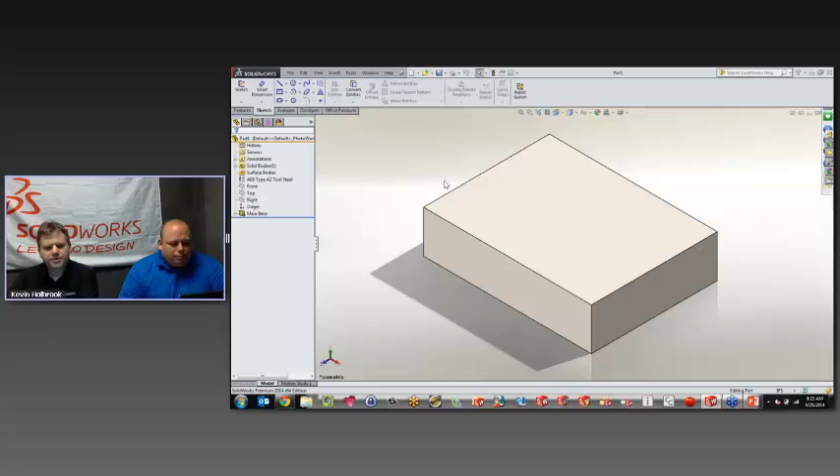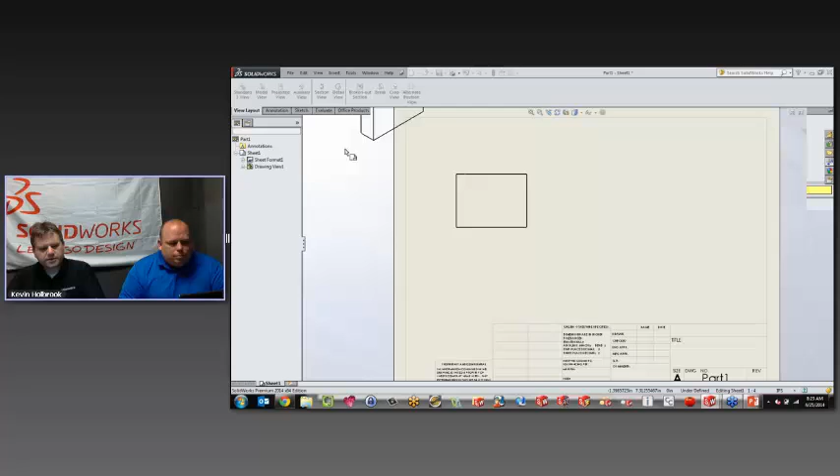So let me just open up a part here. And this was actually one customer that came to me the other day. If you are making a drawing, so let's just save this to my desktop. Just have a block here. Let's make a drawing of this. When it comes to updating your dimensions inside of SolidWorks drawings, one of the neat things is that if I'm placing a dimension in here, this one is 8 inches, when I change the model, it updates, right?

But I think it's important that, again, as Rob said, they do listen to customers when they have suggestions of things that they need to see. If you didn't know, if you go over and right-click on the top of your drawing here, there are actually checkboxes where you can check or uncheck if you want the view to update automatically.

So if I keep it checked on, as it is by default, if I go in here to my part and I change this to, for example, 12, and let's do a Control Q so it's updated, then it has automatically updated on our drawing. That's how we normally see it. But sometimes, if you're playing around with different sizes or different things, maybe you'd rather want to be flagged about it.

So you can actually go over here, and if you uncheck this automatic view update, now when I go back to my part and change this to something else, maybe 6, you will see when I go back to my drawing, now it has this orange, yellow update here, and we got the flag. So I think this is important to know. Now to fix this, all we really have to do is a rebuild, and then you will see that it updates. It's kind of like one of these gates. So that could be handy for you, and it will flag, right?

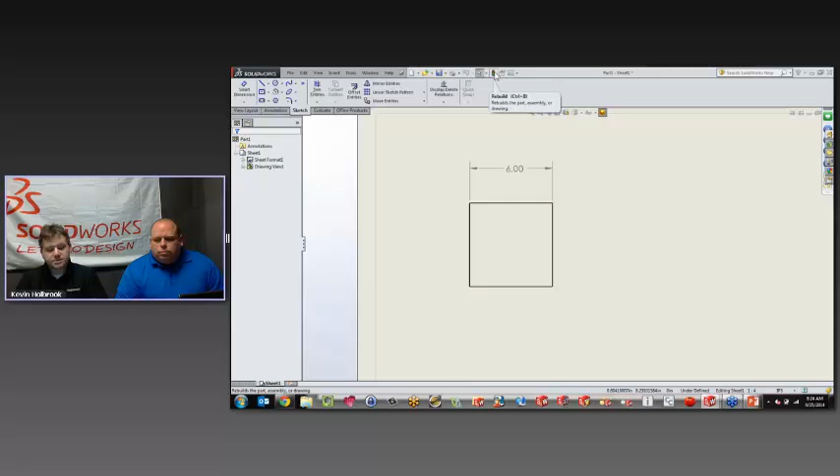So it's not like it's going to do it automatically, it will just ask you, hey, are you sure you want to update that? I thought that was a pretty neat little trick.

On the assembly side, that's great if you have a large assembly that takes a while for the drawing views to update. Maybe suspend that a little bit. That's a good one.

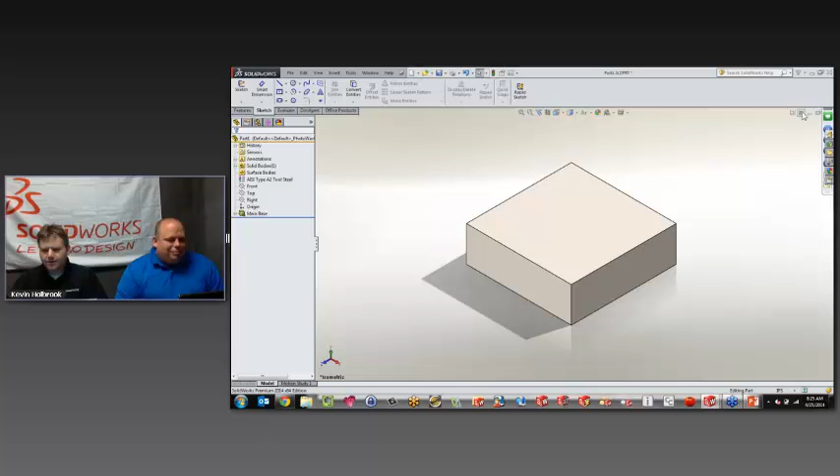Yeah, absolutely. Another thing I wanted to show here before we send it over to Kevin is, let me just open this. I actually spent a little time and modeled something really complicated up, and now I have this in RAM because I saved this. Now I have everything open here.

All right, Kevin, I know that you're working in SolidWorks a lot, but I wanted to ask you a question. Do you ever use Format Painter when you're inside of Word? You know how you can take some text and change it over? I have seen it. Have I ever used it? No.

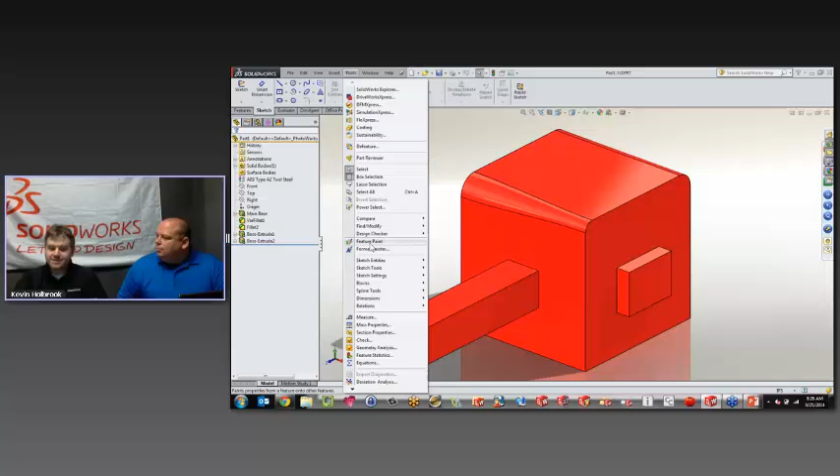Now, did you know that in SolidWorks there's something called Feature Paint? Do you ever use that? I have not. It's one of these interesting ones where it's always fun to come up with tips and tricks, and then when you're goofing around inside the software you're suddenly like, what does this do? Well, Feature Paint is inside of SolidWorks right underneath your tools, and what it will let you do is take a feature and copy its properties over to another feature.

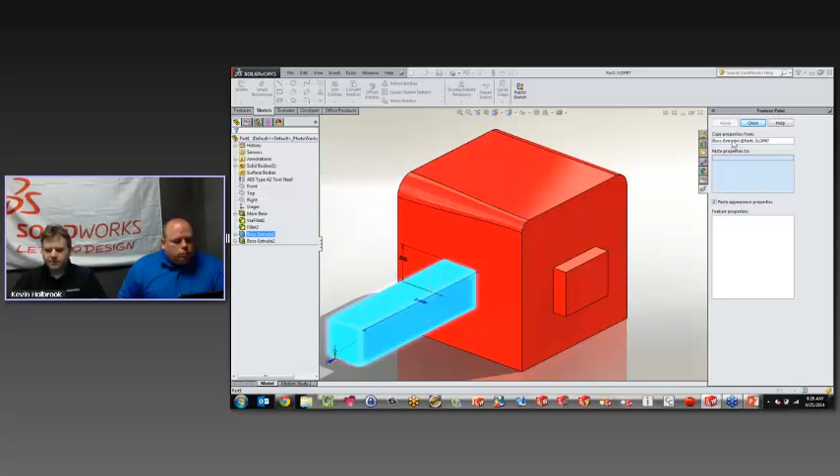So in this case, I have this very long boss right here, and this little short boss over here. I can go over and click on my large boss, and you'll see that was selected. Now I can select my short one, and all the properties for that one apply here. If I hit apply, you'll see the second one suddenly took the same depth as the first one. So if you have some pockets and know that depth is what you want the others to do, you can use Feature Paint to bring that over.

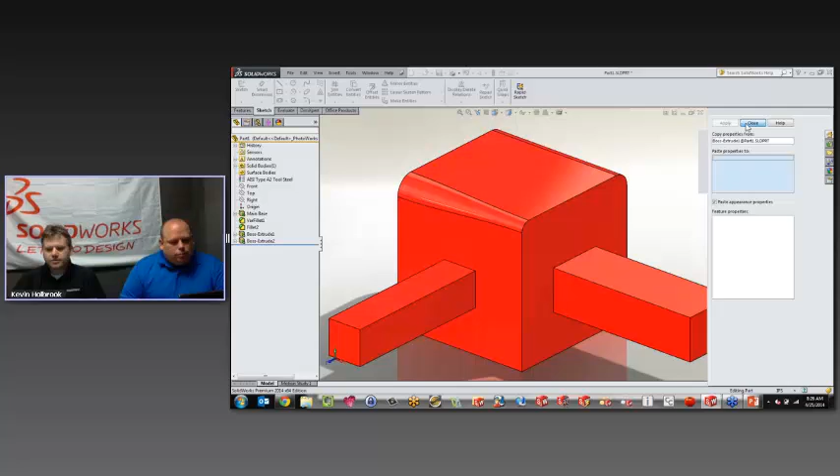It also works on colors too. So if you ever work with somebody, maybe somebody like me, who goes in and decides they're gonna paint a certain feature - in this case we cannot do faces or bodies - but if I go into this variable fillet here and decide I'm gonna make that one, let's get a little dark purple, because if it's too purple people are gonna make fun of me.

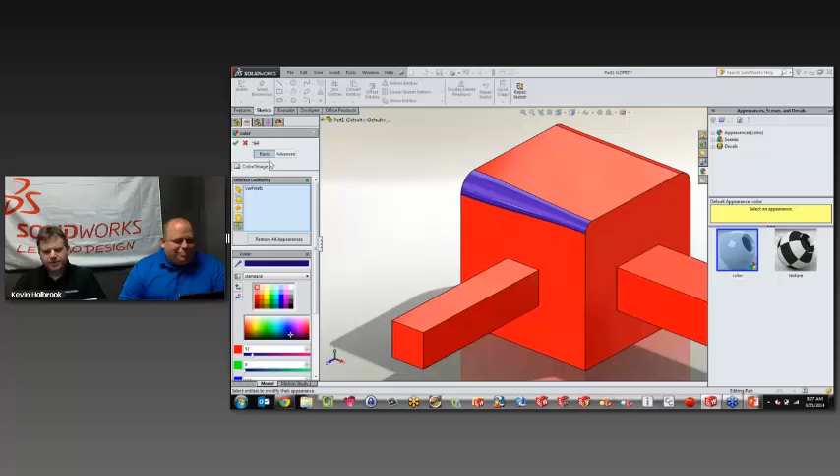You can take this color and paste it over on another feature. So if you go into Tools and Feature Paint, you could select that variable fillet over here, and again we have the fillet sitting on the other side. We can select our feature tree - seems that was a little bit easier - and now you can paste those colors over there.

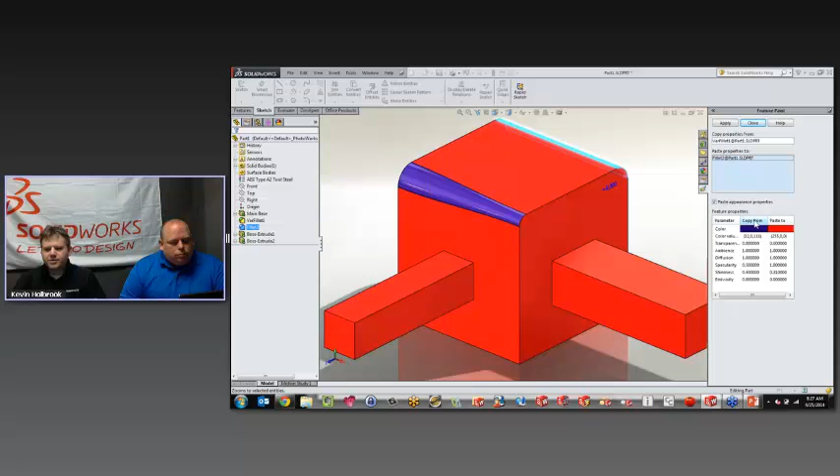Now you could also do that in SolidWorks - they added a new function a few releases ago. If you click on that - oops, let me get out of Feature Paint - click on this one here, there is the copy and paste appearance. You can go over here, click on the two small beach balls, copy that appearance, and then go over and paste it onto that too.

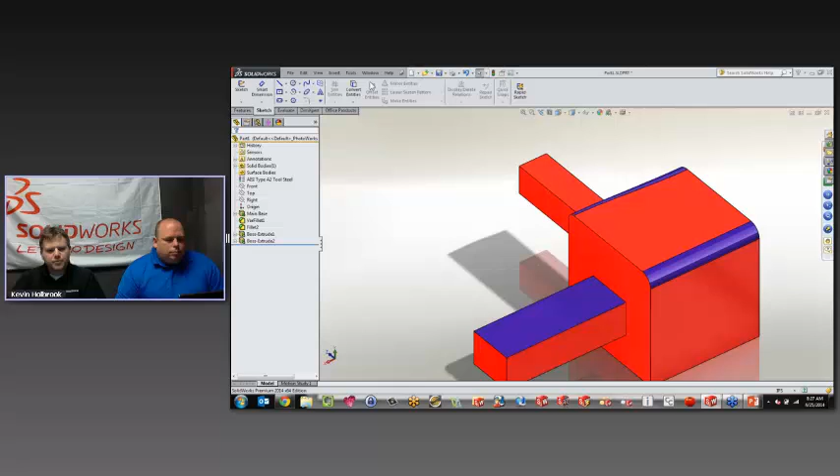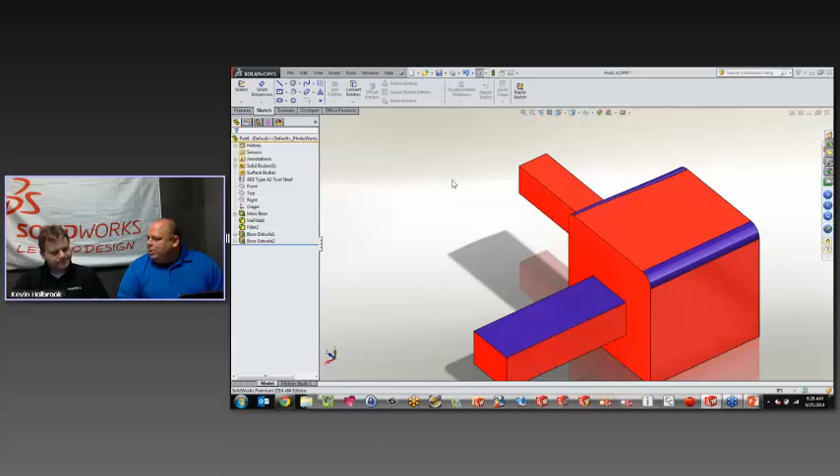But this Feature Paint, I think, is a pretty neat new discovery for many. Sure, there's a lot of uses for it. When you start thinking about it, you have some different pockets all at a certain size, and other pockets that need to be that size. All of a sudden you decide you want to make all the holes the same depth - you can go edit the feature and go through each of them, or you can just go over this feature tree. Heck, nothing wrong with that.

Cool, all right, so let's see, what do you got, bud? So surprisingly, Lars, I found a drawing tip and trick, just like you. Awesome, that's been there, it's just kind of one of those things that maybe you're just not aware of why it does certain things. I just want to illustrate.

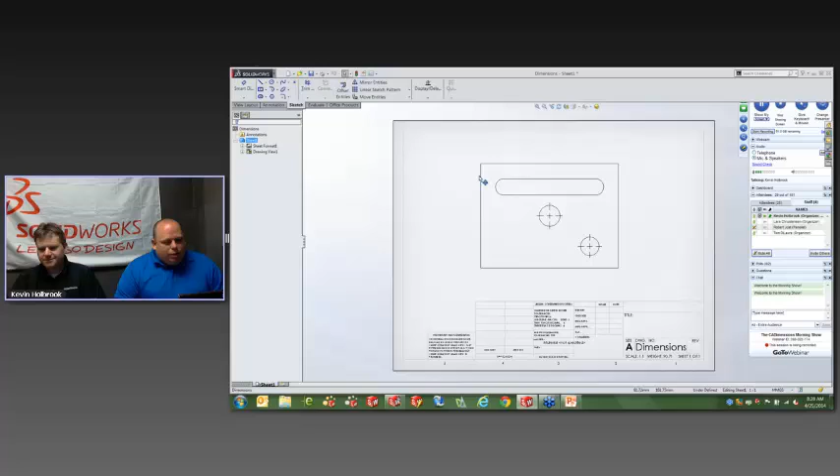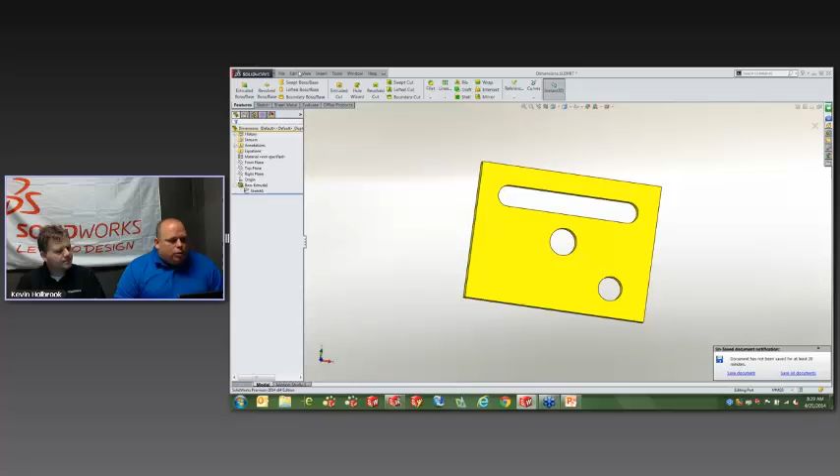This is obviously a drawing of a very simple part, but if I look at the sketch of the part itself, I have all my dimensions placed on there. I may choose at some point to put them onto the drawing, but the ability to do that is somewhat skewed by where they get located when I actually do that.

So I go to drop these in using insert model items, and this is what happens. I bring them all in, and I have a big mess. And I spend the time positioning and locating all these dimensions.

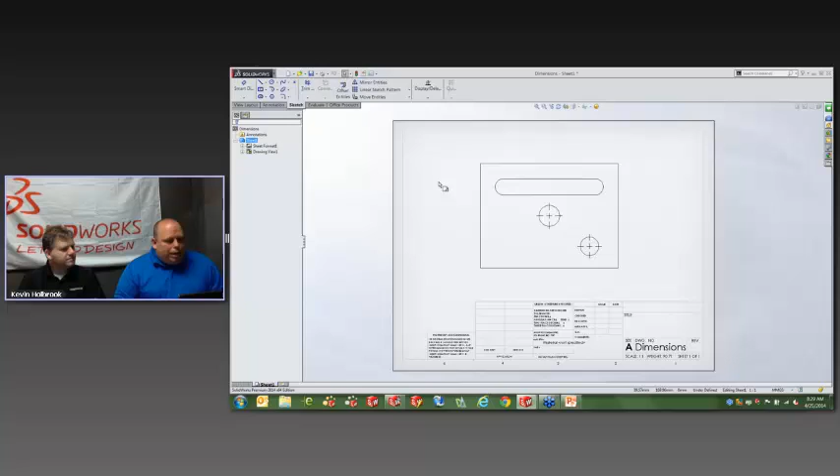But what you may not be aware of in the software, and why it's on by default, I don't know—I think it shouldn't be on by default—is at the bottom of insert model items, you have 'use dimension placement from sketch.' Therefore, wherever you drop the dimension as you're sketching is where it's going to use to position it on the drawing.

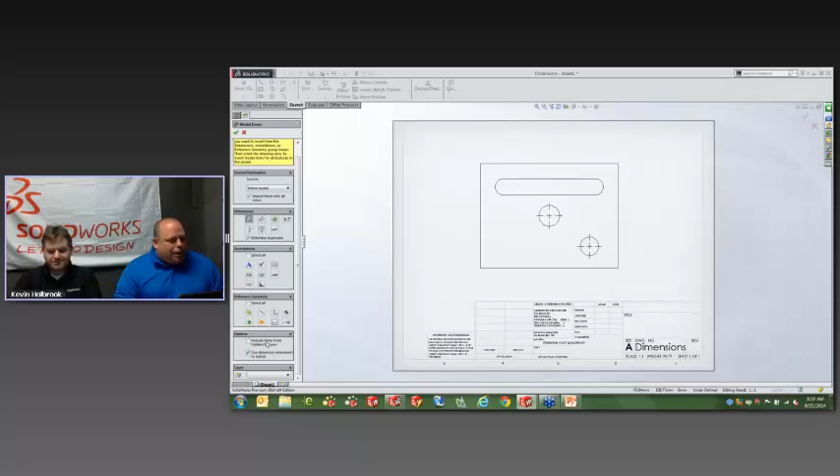And when you're sketching inside a part, you're typically not even looking straight on it, you're just kind of dropping wherever you need. But in this case, if I turn that off, which I think should be off by default, the software is actually going to distribute and place the dimensions around my part in a much nicer fashion.

So I've heard customers say, well, I don't use dimensions from parts because when I do, it's just a big mess and I feel like I have to redo it anyway. Turning that off is at least going to give you some placement that varies between the dimensions, so you can distinguish and decide what you want to remove.

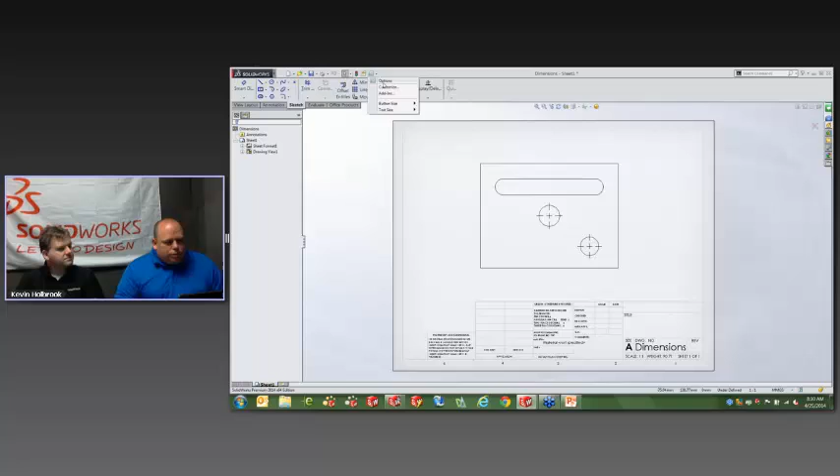But I want to take that a little further. In your tools options for the drawing itself, under dimensions, you'll have an area off to the right called offset distances. These offset distances actually dictate how far away from each other they get placed and how far away from the model they get placed.

I'm going to kind of exaggerate this here. I'm going to say, when it spaces out the dimensions, I want them 10 millimeters from the model, and we're going to make them 10 millimeters from each other.

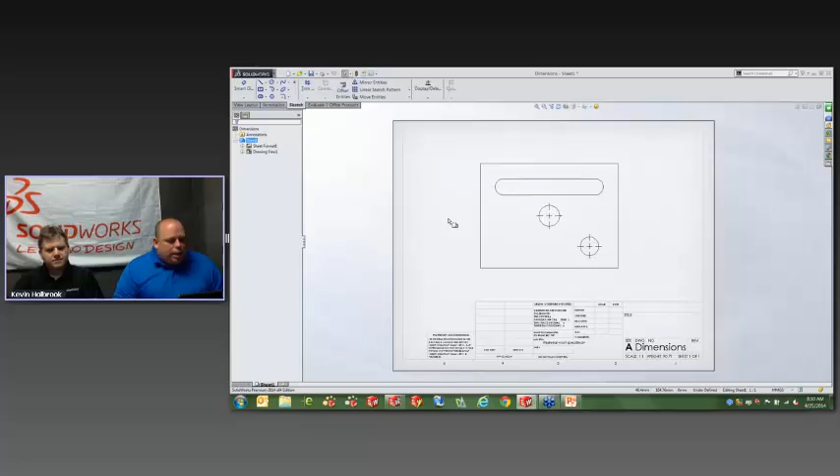Now when I do the same thing, I insert the model items and turn off 'use dimension placement from sketch,' you can see that they are further separated from each other. And the more you play with those numbers on your templates and set those up, it's going to make it easier to bring in these model items and start to work with them.

So I think that's cool, a nice little tip that's in there. The second thing I have relates to circuit boards.

Now, not everyone has premium, right? So not everyone has CircuitWorks. True. However, everybody on here that's using SolidWorks has CircuitWorks, but probably doesn't know it. They have a version called CircuitWorks Lite.

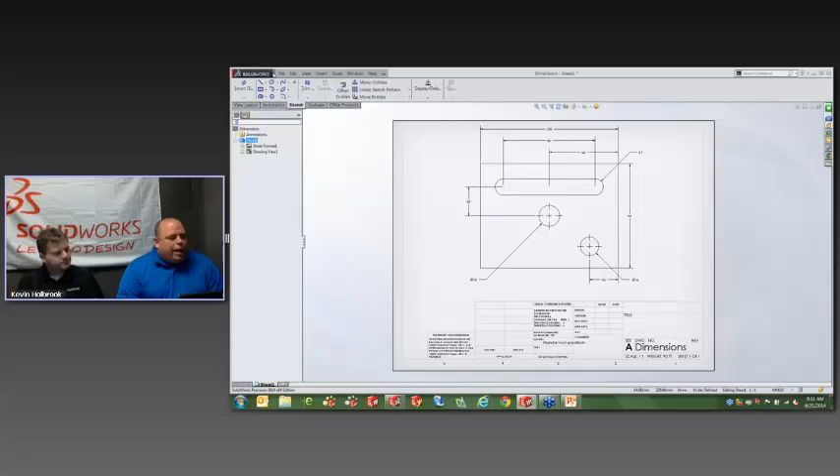I get asked this simply because we'll walk in and customers want to have their circuit board shown, but they don't have premium—maybe they haven't been able to justify buying SolidWorks Premium. However, if I do a file open in SolidWorks, many of you may have noticed this IDF import at the bottom. IDF is an intermediate format coming directly from ECAD or board design software, and you have this in the base package of SolidWorks.

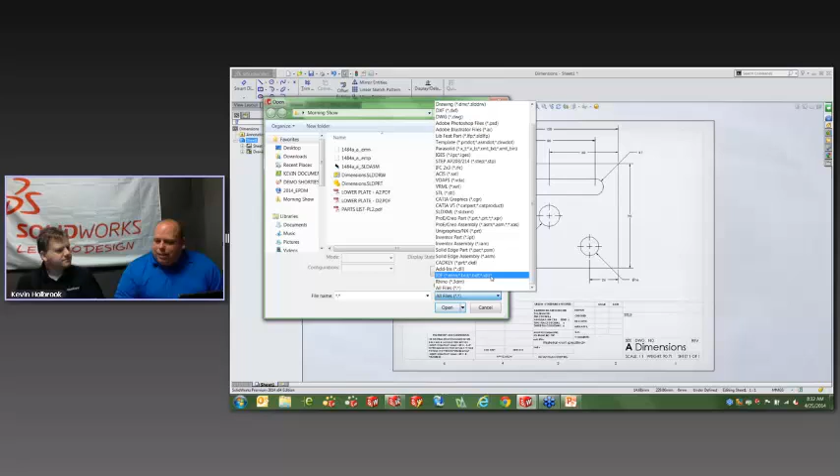So what happens if I decide to open up one of those files? Now, because I have premium, the software is automatically going to say, do you want to use CircuitWorks to do this, or do you want to use CircuitWorks Lite? CircuitWorks Lite is included in every seat—you may not be aware of this.

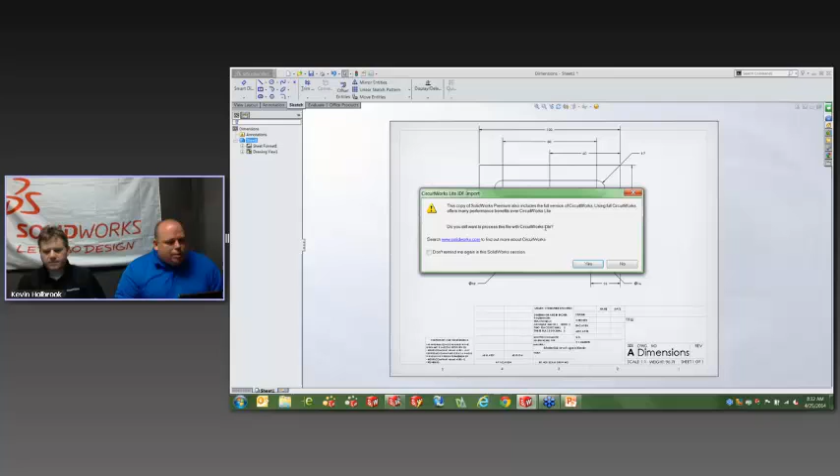I'm just going to tell it to process it with CircuitWorks Lite. It goes ahead, tells me how many components, and it's going to go ahead and build my circuit board.

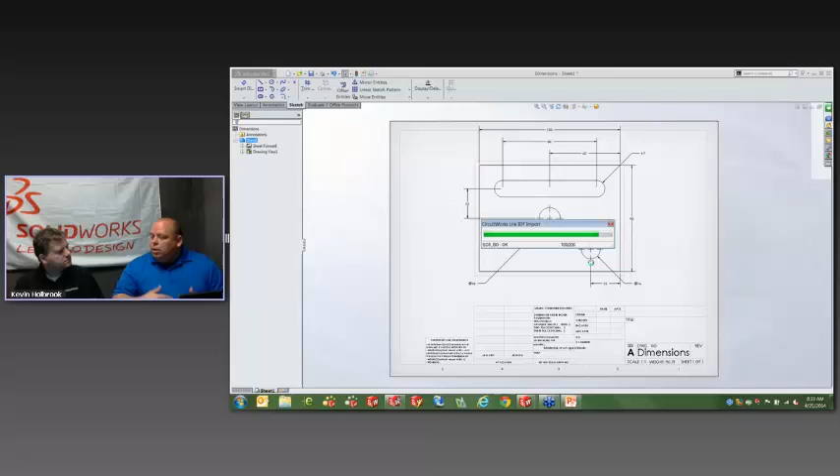Now, just like our Express Tools, a light version and a full version, there's going to be some variation in what it supports. What you're going to see with using CircuitWorks Lite to open board designs is it's going to open it up as a single part with multiple bodies. It also has some limitations to the number of components it supports—hundreds versus the thousands in CircuitWorks.

That makes sense. However, you do get a full board with all your Z heights, all your components, and components get named. What gets a little bit harder is if you want to structure this in, let's say, a bill of material where you have the board and each component listed on the bill of material as an assembly.

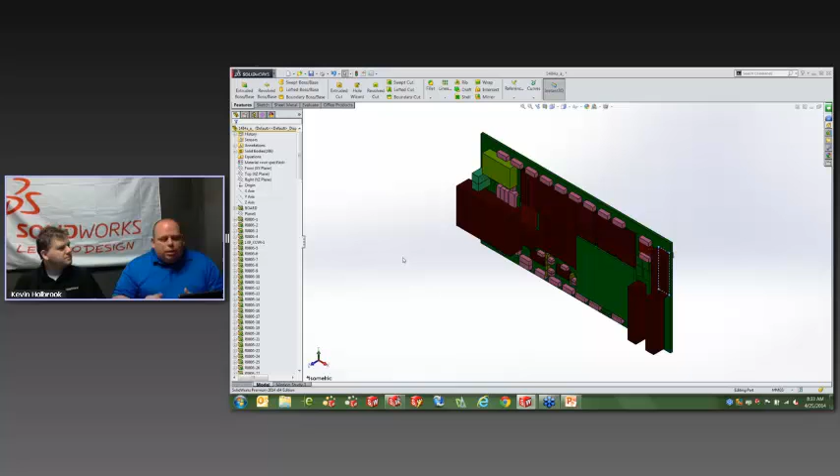Just for instance here, I did the same board as an assembly using full-blown CircuitWorks, and you can see that each of the components come through as separate components. It also will support other things like trace paths and holes and other variations. But if you just need to bring it in, absolutely, right? And you just may not be aware that it's even there.

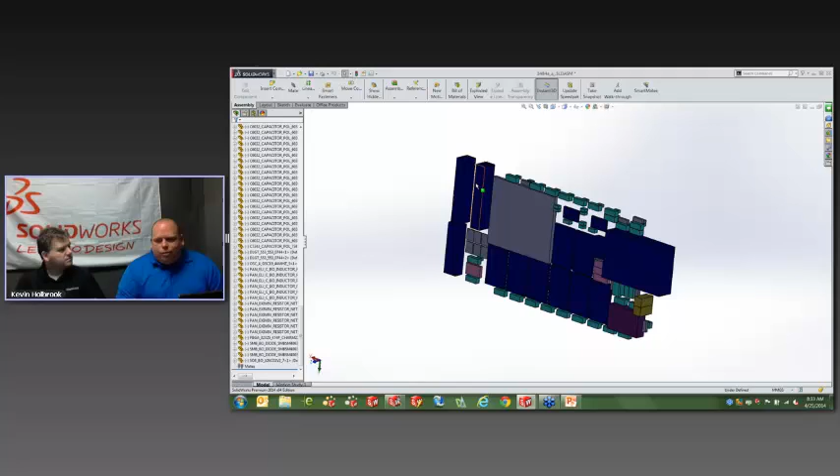So I guess the first thing to think about is going to your ECAD group to find out if they can provide you a format out of that program that can be read in here. And like I said, it's an intermediate format. With Lite, it doesn't support this full spectrum of formats that the full-blown CircuitWorks does. And the other thing is that your ECAD group has to be putting in Z height data for all your components so it can read that in and actually build the height to each of those components.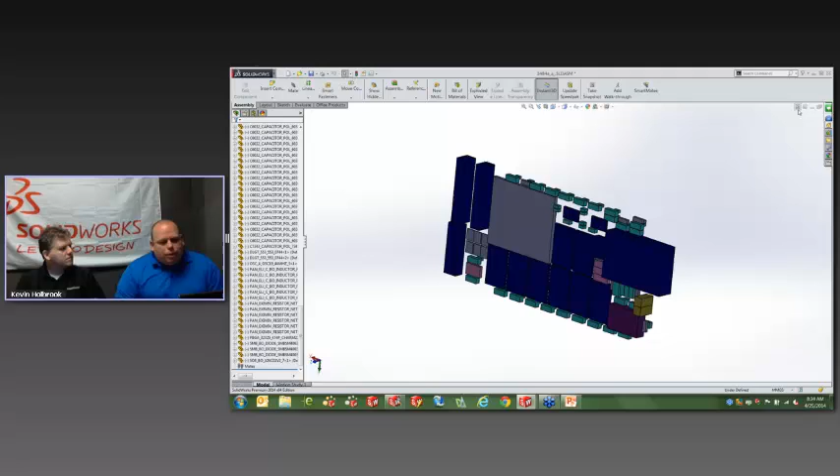But I think that's an interesting point, because that's really one of the things about SolidWorks: they import a lot of things, right? So a lot of the other CAD softwares, at least back in the day, you had to buy all these different converters. Whereas SolidWorks actually has all those converters built in. So once in a while, I just go to File Open and just see the, I call it the Cheesecake Factory menu of different things you can bring in.

So moving on a little bit, in the last 6 months or so, there's been a lot going on at SolidWorks, new products, a lot of things coming out. So we wanted to start to introduce some of that. What was released Thursday last week? Something like that, yeah. So SolidWorks Inspection was released.

SolidWorks Inspection is a tool for creating ballooned inspection drawings and inspection sheets, typically an Excel file or some external format, where you have the dimensions, the tolerances, the inspection methods sorted in such a way that the person doing the inspecting can give the inspection, type in the value, and see if it's within reason to the characteristic itself. So SolidWorks Inspection is released, and I just wanted to give everyone a taste of what SolidWorks Inspection can do.

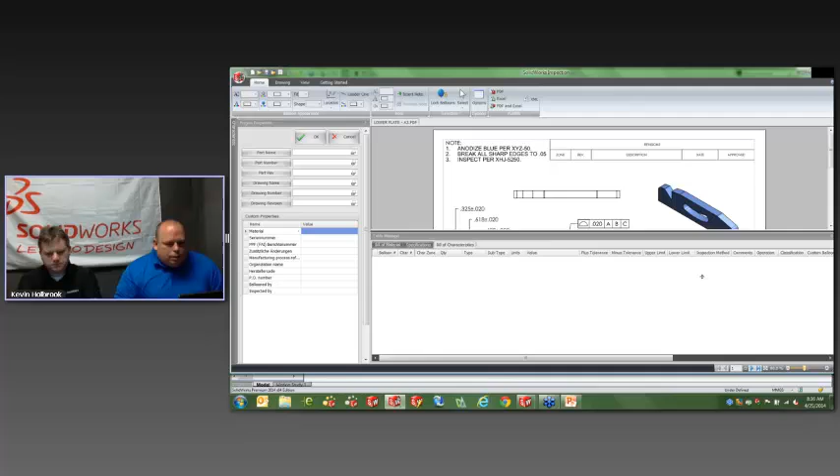In this case, notice the formats that I'm dealing with: PDFs, TIFFs, and I open these up into this external program. I'm not in SolidWorks at this point, but I do have the ability to see my SolidWorks drawing. The interface is organized a little differently than we're used to. However, it does have the tabs at the top, typical of our command manager.

Now, the first thing I need to do in this project, remember I'm viewing a PDF file, is to fill out some information related to the project itself. That information consists of things like part name, part number, and you can see other custom properties. Now, because this isn't a SolidWorks file, I don't have custom properties like that, right? And there may be some metadata in the file. However, I need to get this information.

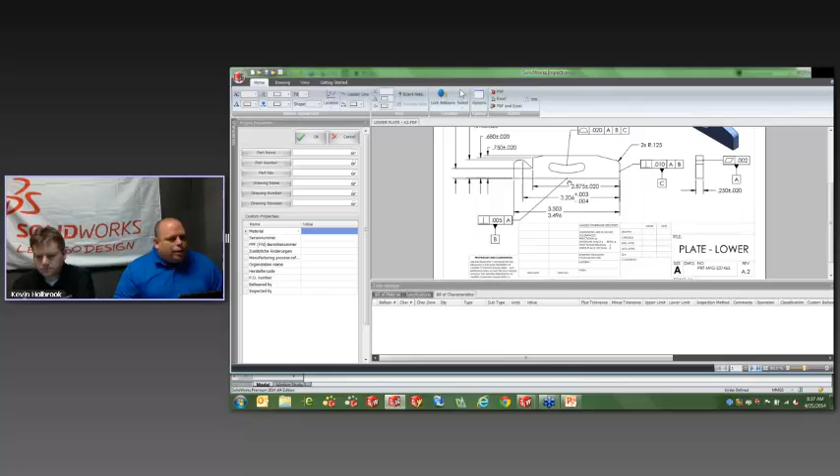Now, this particular tool uses a technology called OCR, optical character recognition. I'm just going to zoom into the model a little further here so I can get closer to what I'm looking for. I can use the OCR to window over the text on the PDF file, and the OCR software is going to read the text. In this case, it got it exactly right. And this is a PDF, so I can continue to fill out project information by just mousing over and windowing over the individual pieces and filling out the rest of this information.

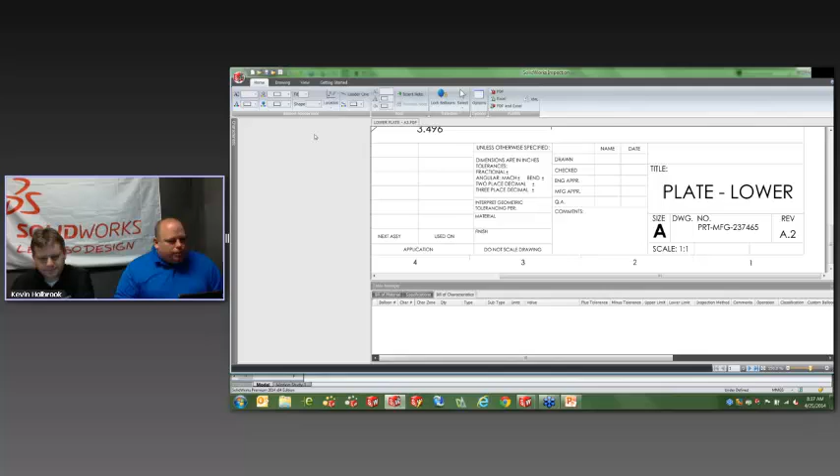Now, the intention of what I have to do here is go through this drawing and really capture all the pieces that we're going to use to inspect to. And the software allows me to set things like what color balloons I want to use in my inspection drawing, what the size of those are, whether there's leaders, and where they're positioned.

You have a lot of control. But then we start to deal with what it is we're actually capturing. Now, when I talk about capturing, I'm talking about this OCR recognition that you saw me do in the title block there. But we can capture dimensions, notes, tolerances, surface finishes, welds, and when we capture them, we bring them down here to the bottom to a place we call the bill of characteristics. It reminds me a lot of a bill of material in SolidWorks in that it has a bunch of headers that have information that it's reporting on each characteristic.

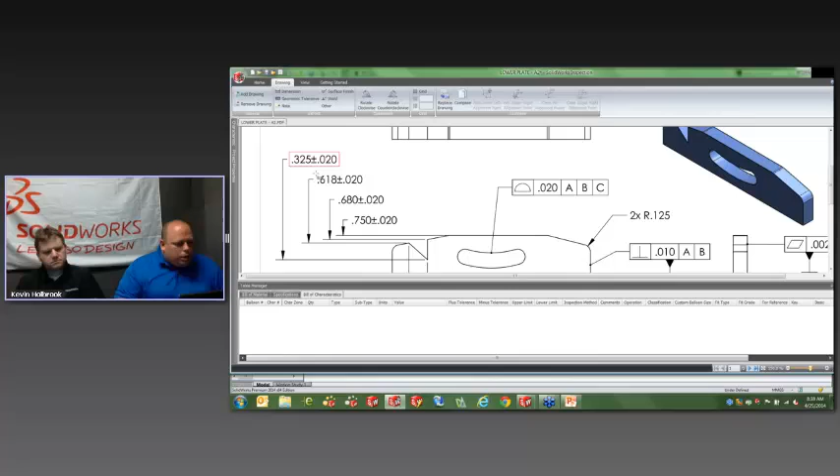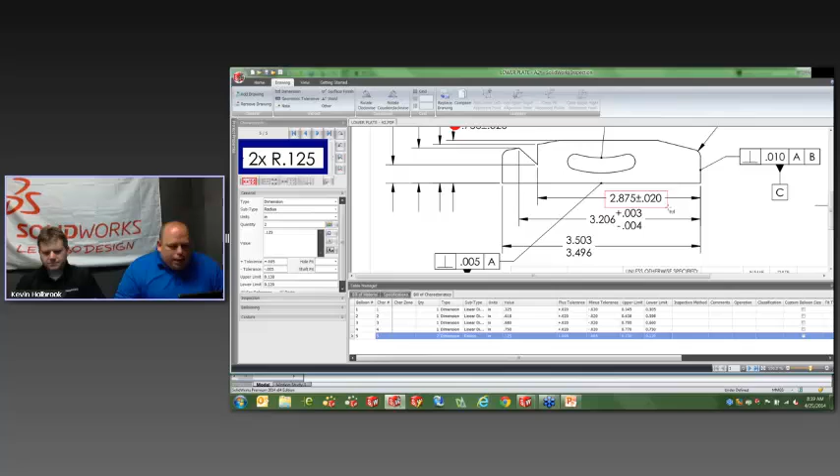Now, this is how you might typically use this. I'm just going to tell it I want to capture some dimensions, and I'm just going to go through each one by one and start to capture them, and it's going to increment the balloon number as I do this, and I can work my way around the drawing. Okay, we'll go ahead and, not that one. There is a function to delete. Like that. Let me just head down here. I can go ahead and continue to capture the characteristics that I want.

Now, in this case, you see what I just did is I captured the character and never got the tolerance. I easily can come back through and say, you know what, let's recapture that. I didn't quite get that right. I can get the information that I need. But it's actually capturing over to the left. It's actually capturing the tolerances too.

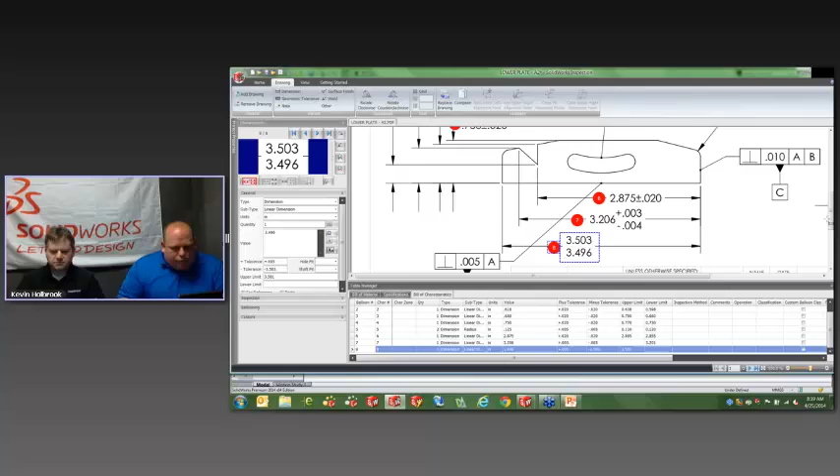Yeah. So what happens is, and the reason I kind of flew right through that is because each capture, what it's actually physically doing, let me go to number 1 here, is it's capturing a picture of the information, and it's trying to extract the rest of the detail about that particular dimension, while at the same time ballooning it for you and maintaining the balloon numbers. So in this case, for our first dimension, it was able to determine the nominal size, the tolerance. It was able to calculate the upper and lower limit just from a PDF file. Very cool. Okay.

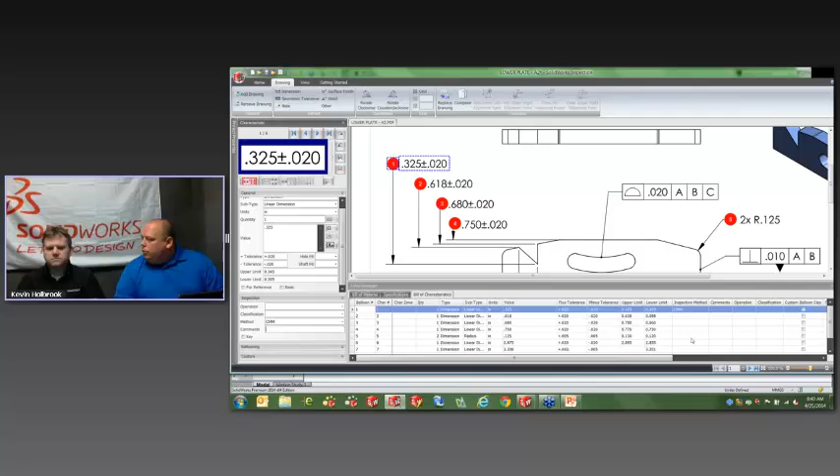Now, sometimes it will, sometimes it won't. You can modify the tolerance values here. But we can also now provide other information about this particular characteristic. For instance, what kind of methods are we going to use to inspect this particular piece? Is this being done on the CMM? Are there any other comments associated with this? And notice when I filled out CMM, it shows up in the bill of characteristics, cool. Essentially bringing all those pieces together.

Now, on top of that, we can go ahead and grab GD&T frames and pick characteristics within those frames and tolerances and notes the same way. All of this, the intent is to be able to get this data out of the PDF and into an external file, right? Yeah, because it's not doing much good here. Right? Yeah, I mean, I got this bill of characteristics. It doesn't help me externally when I'm sitting at the CMM or I've got the calipers in my hand and I'm trying to do these measurements.

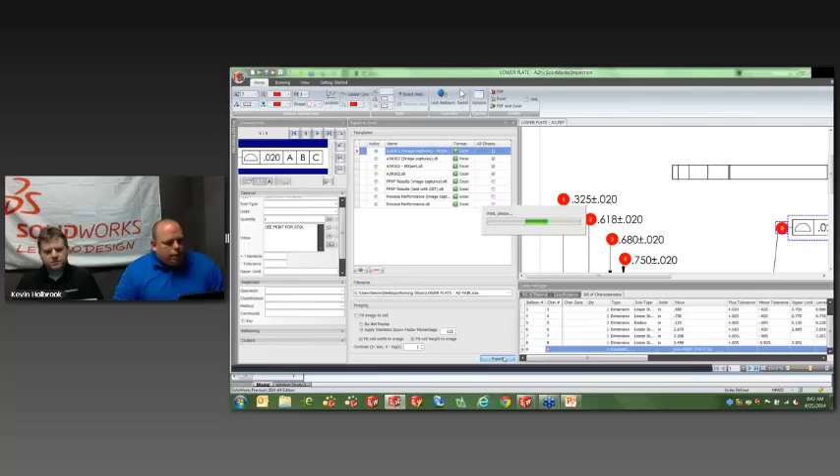So with inspection, you're going to have the ability to export both the PDF, which is the ballooned PDF, or PDF plus your template or Excel format. I'm just going to export the Excel. Now, there's a bunch of forms like your AS9102 and your PPAP forms that are included with the software. And what you're essentially doing is telling the software, okay, what it is we're trying to export in this case. And there we go. Kind of hard to see. It'll go ahead and take that bill of characteristics and export it directly to that Excel file.

Now, what this eliminates, obviously, is the need to go back and forth and look at the drawing, type the value in, absolutely, sitting there and just typing, 25 inspections and figuring it all out. So with your experience, how long would it, I mean, an average drawing, 50 dimensions? Oh, sometimes, and you always do inspections in the end. You never have time to do it because the part is running out on the CNC machine, and now you're like, oh man, the operator needs to get an inspection sheet. And, yeah, I have spent hours and hours on creating these because you're sitting inside an Excel.

I know, I was just talking to a guy the other day, he said that he can spend a day and a half on some of his. So, yeah, that's amazing how quick you can generate that. And that's all the numbers right there from your PDF. Yeah, and the high probability of typing something in wrong. Oh. Just human nature. Right. Well, and the math, it's doing the math.

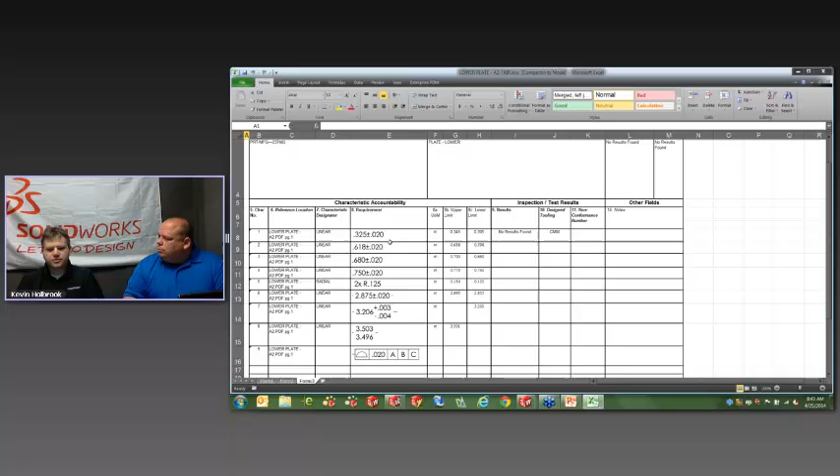You can see if you're looking, so you have the dimension, but it's even showing you the upper and lower limit in that column. That was sitting there with a calculator putting all that in. That's awesome. That's pretty cool, man. I really like that. And then it works with PDFs, so many people get these PDF drawings.

But this is the morning show, and this is CADimensions. This is SolidWorks. I think this should run inside SolidWorks too. PDF isn't good enough, huh?

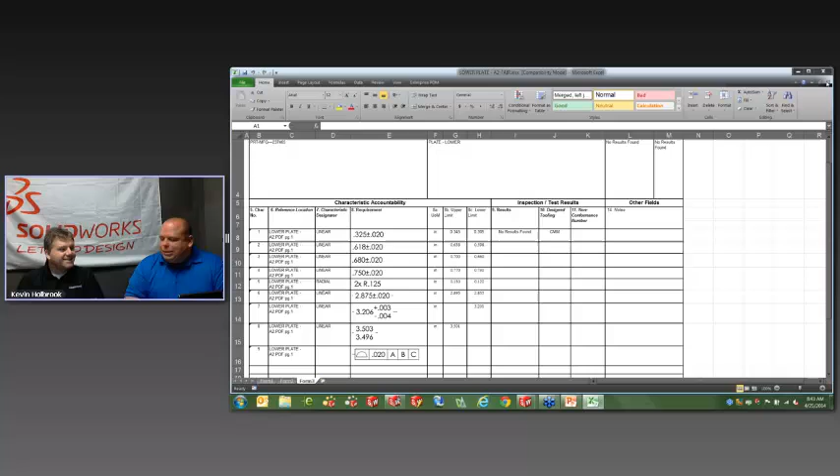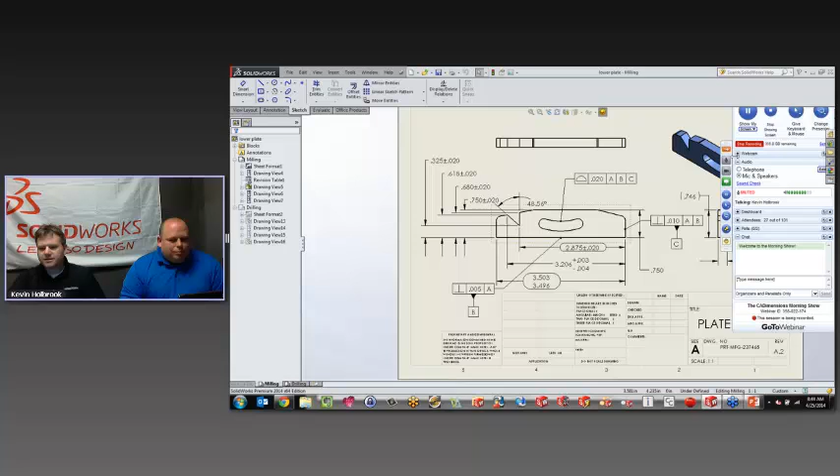Well, if you do get PDFs, that's very helpful, and this software comes in two different variations, so you get both the one that runs inside SolidWorks and one outside. So if you do get PDFs, using the one outside is definitely worth it. But yeah, this is SolidWorks. So I have the same drawing that Kevin had here, but I modeled it up in SolidWorks instead because I think SolidWorks is maybe a little cooler here.

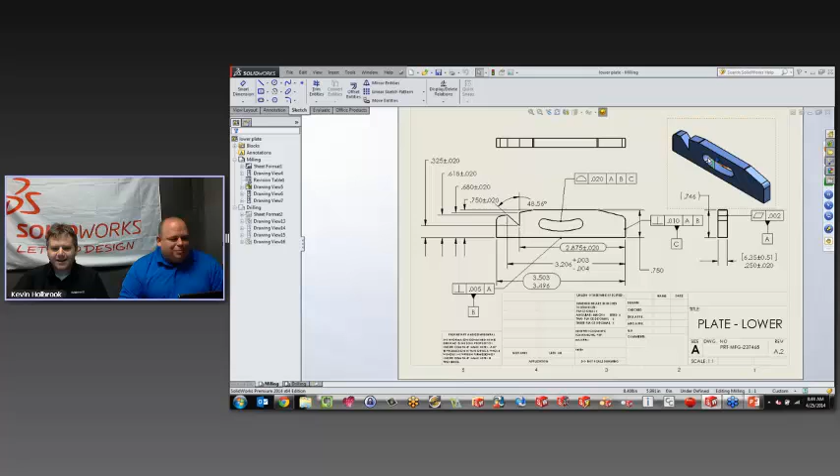All right, so you can all see my screen here. So this is SolidWorks Inspection. Like I said, it comes in two flavors. There's the one where you can import the PDFs and the TIFFs that Kevin was showing, but it's much cooler to do everything inside SolidWorks. So it's an add-on. You can go in here and turn it on as an add-on. This is where all the SolidWorks add-ons are if you're doing simulation or routing and all the others. You can see it's sitting right here, SolidWorks Inspection. So let me just turn it on here.

And really what you get is the command manager up here, the ribbon bar up there. And then we also get another little tab over here that we can work with. Now, what is really neat about Inspection inside of SolidWorks, because that's where I prefer to do my drawings, is that we already have all the data in here, right? So there's really not much to do.

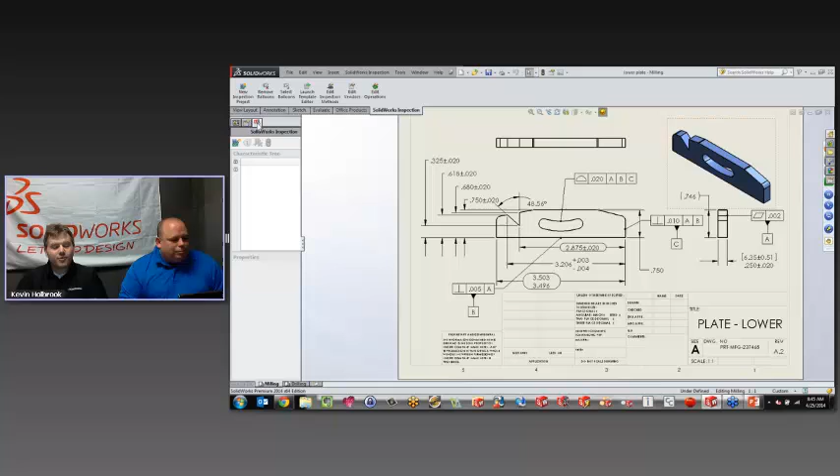I'm going to start a new project in here, and again, I get prompted with really the same interface that you saw Kevin had, because there's always certain things you have to put in there, such as your part numbers and your part names, and I can start typing them in. But if you use custom properties, which I think everybody should do, you can click on here and bring up the custom properties right from your file. I think it's all right to be lazy when you're working with CAD. So I can just grab whatever I want and click on it and it fills it out.

So now, what rev was that? Well, if you have that on your custom properties, you can just fill this out. So that's pretty easy. You can, of course, control all the options you need, what numbers you want to start with and things like that. Now, you go to the next tab over here. Now we can control what we want SolidWorks to grab, because it knows we have all these dimensions we just put on our drawing.

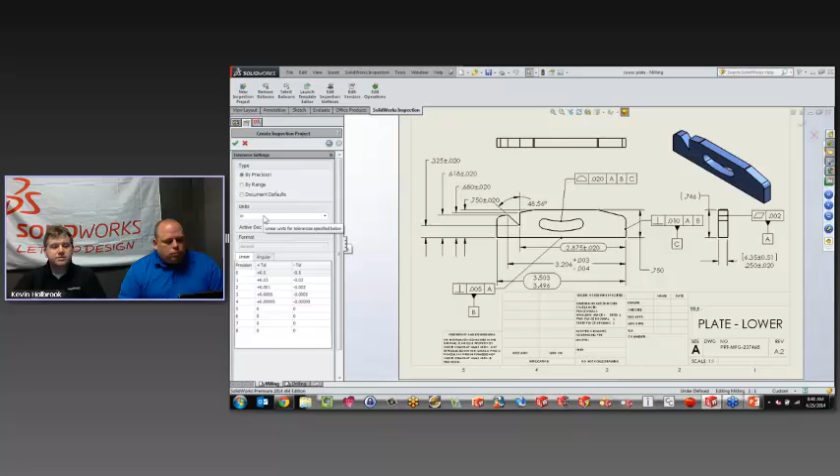So now when we come to the point where we're actually going to start inspecting it, we start thinking, well, maybe I don't want to show certain things, maybe I do. Maybe I don't want my notes included in this one. I just want to take a few inspections. You want to take whole call-outs, GD&T. So you just check what you want. And then you can change your tolerances, really just hitting the green check mark. And at this point, I've actually extracted all the different things that I wanted out of here. So now I can just quick balloon it, right?

Set your balloons, and now I literally have the different balloons for the different tolerances and dimensions that I chose to check. So you see all the ones marked for inspection now have this in here. And of course, this is SolidWorks, so you can grab things and move things around, so you can organize things where you want them in the tree, for example.

If there's certain dimensions you don't want, you can just right-click on them and turn them off if you don't want those to be inspected. So you have all these different functions in here. And of course, what is neat about this too is that since we're inside of SolidWorks, if you do make a change to the part and you then come in here, you really just have to quickly update your balloons and the dimensions would have changed.

So again, like you said before, retyping things, that is just a chance for a disaster, right? When we got to sit there and type it in manually. And then again, from right in here, I can actually take this and I can just go ahead, like Kevin did, and export this right out into my Excel spreadsheet where I want to end up anyways, right? So now I have that inspection sheet right here that I can now print out.

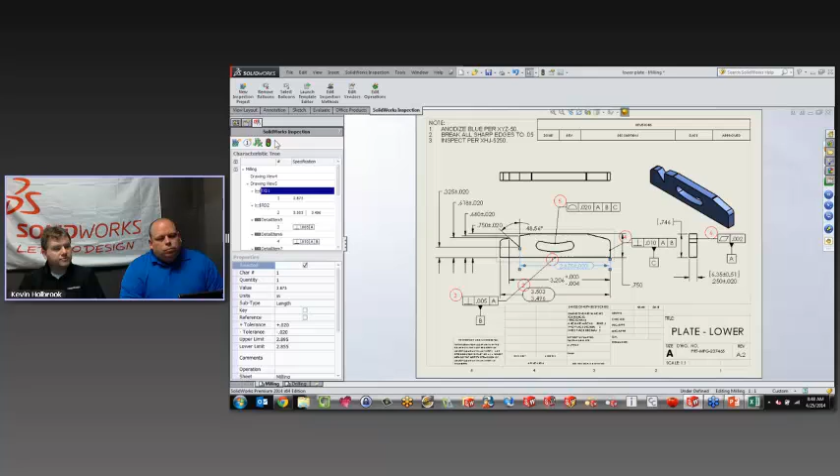And again, if the customer calls, because as always, I've never ever modeled anything up and the boss was like, yep, that's what we want. Go ahead. There's always a change, right? And again, because we're inside of SolidWorks, that means that when we update the model, we can literally just go in and re-update this in here. You can see we have the little traffic light in here, which we're familiar with, and then we're running. So pretty neat how it comes in there.

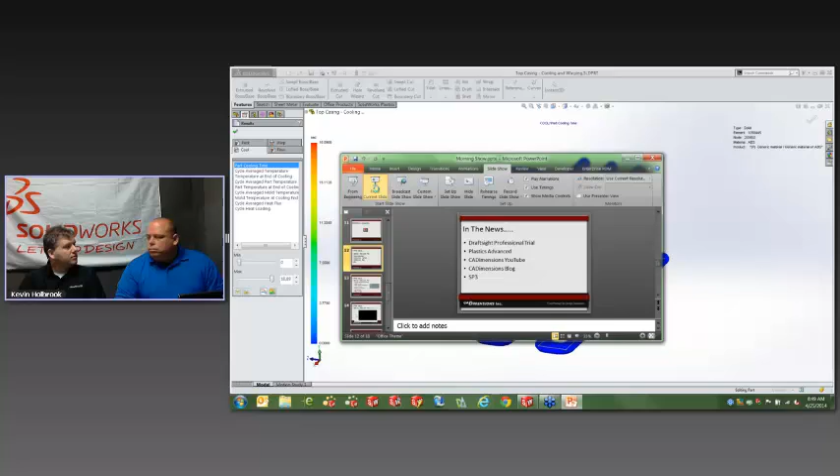It's important to note with the forms, there's some included forms. But if you're using an existing inspection form, we can set it up to accept that data as well. There's a form creator that allows you to put the logic in there. So as soon as you export it, it knows where the data needs to go. And again, also with Excel, all those templates are Excel based. So you can put your own company logo on there. You can really make it your own. And it already comes with, I don't know, 5, 6 different ones. One of them has a big logo on it, so you can just replace that with what you have.

Big time saver. And another product in the portfolio. Yeah, well, it's just cool how they keep on adding these in there. Like, it just makes our life easier, right?

Absolutely. So our next segment, we just want to talk a little bit about what other things we're hearing, or we'll call it in the news, and we'll keep this fairly brief this morning, let you get going. But DraftSight Professional. Some of you are saying, there's a professional version of DraftSight? Well, as of right now, there was DraftSight, the free download, and then there was the premium pack, which was a paid version that allowed networking for larger organizations. But for those folks who wanted some of the premium features but didn't have 5 users, they've developed DraftSight Professional that included all the tools that were in the premium pack, but this is for the individual user.

Some of the things that you may want to try out, the toolbox standards and the APIs to write your own thing in DraftSight. Now, the reason I bring this up today is because you can try DraftSight Professional for free for 30 days. And you don't need to contact CADimensions. You don't need to do any of that. If you open up your DraftSight and in the command prompt at the bottom, type in this: _starttrialDraftSightPro. Start trial DraftSight Pro. All right, I can do that. Restart your DraftSight, and then you will have 30 days of all of the professional features.

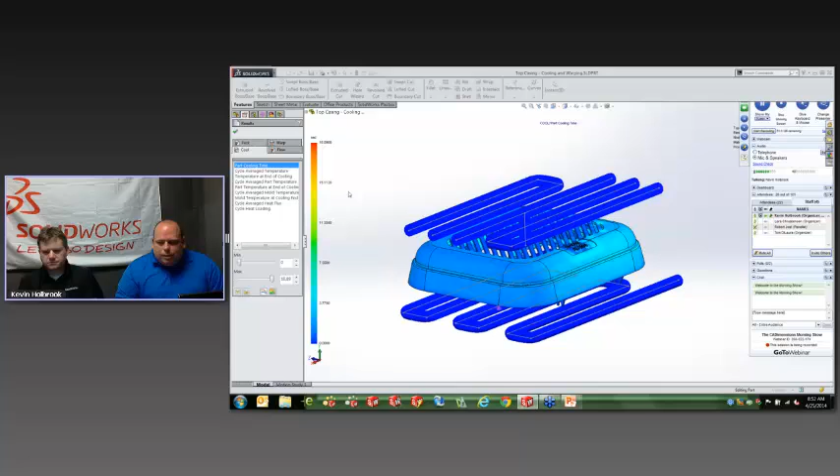What's that look like? Or the cooling lines? Well, recently, within the last few months, SolidWorks has released Plastics Advanced, which includes your warping and your cooling analysis. And I just wanted to give you a brief look into what that looks like. Inside SolidWorks Plastics, we can now get the ability to model up your cooling lines to provide optimal cooling to your plastic parts throughout the entire cycle.

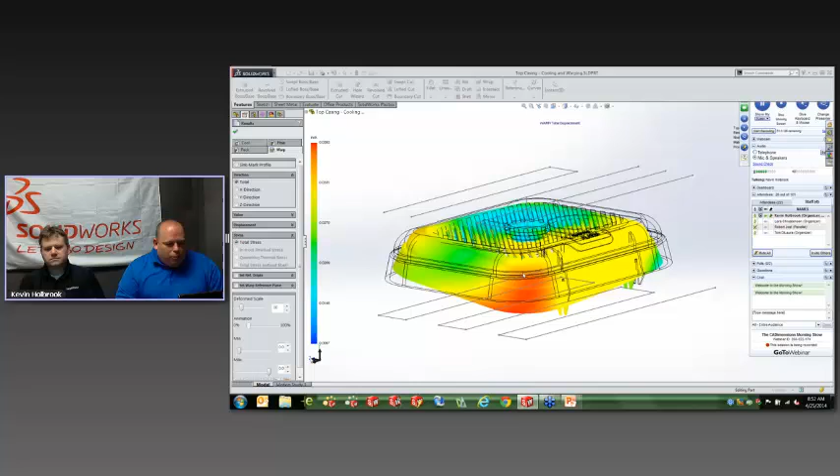Now, when you provide the optimal cooling, you're going to have the ability to see after the part cools how much is it going to warp and what is that warpage going to look like. Now this particular part, this is 10 times the actual warpage, but you can clearly see that this corner is going to have some more bend to it after it cools off than the rest of the part. Yeah. Therefore possibly causing an issue.

Now you can look at gating it, cooling it differently, and I think this rounds out that group of plastics products. And it's a lot easier to do it now where you're looking at the screen instead of when you're standing with the part in your hand and the mold is built, right? Absolutely. Absolutely. I mean, how do you make a decision? What do you go after next to minimize warpage?

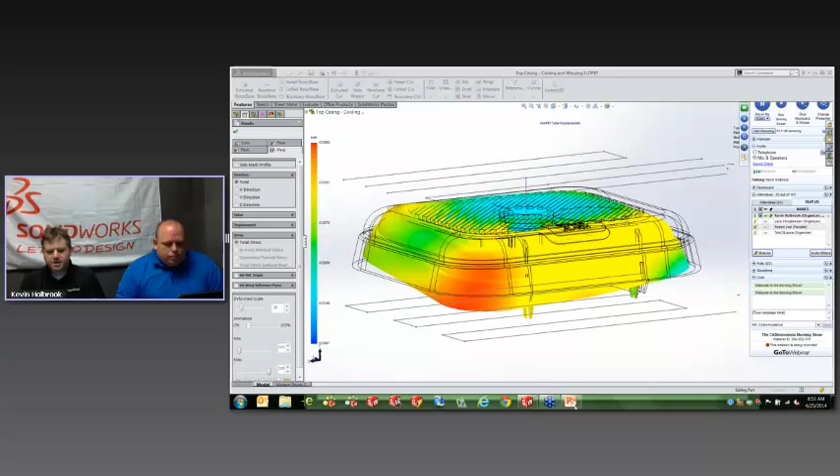That's really, really awesome. Cool, man. All right. Well, that's some good news. Yeah, it's pretty neat how SolidWorks is just adding these different ones on. I really think that's awesome. Very cool. Presenter? Make me the presenter, please. There we go. Awesome. What's in the news on your end?

Well, on my end, we can announce that SolidWorks Service Pack 3 is out, and you already saw Kevin and I showed the SolidWorks Inspection. For me, it's like, yay, it was in Service Pack 3. Again, I know a lot of companies are waiting for a certain service pack before they start updating to the next release. If you want to wait for Service Pack 1 to come out, or if you just want to be secure, Service Pack 2. We saw earlier with Rob from SolidWorks talking about how they go into their next development.

So after Service Pack 2, there's really not much in regards to any issues inside the software, but SolidWorks Inspection coming with Service Pack 3 just shows that SolidWorks has a lot of different products out there, and they want to get them in there. They don't necessarily want to wait to put them in your hands until the major releases. So Service Pack 3 is out. You can go and download it right now. You should download it if you can, or go back to your IT department, whatever you have to do.